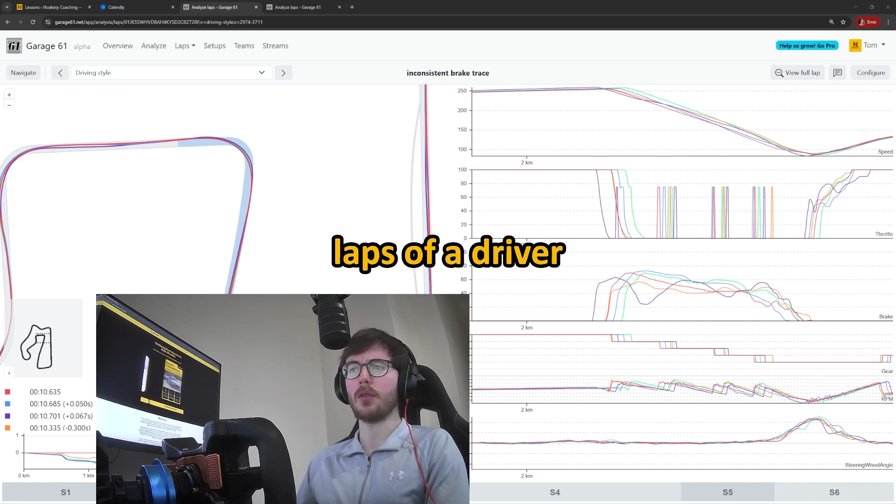So, with that in mind, I want to show you how to use telemetry to identify whether braking is a source of inconsistency for you. So what I've done, I've loaded up Garage 61 and I've pulled 5 back-to-back laps of a driver that I coached recently before we started talking about braking consistency.

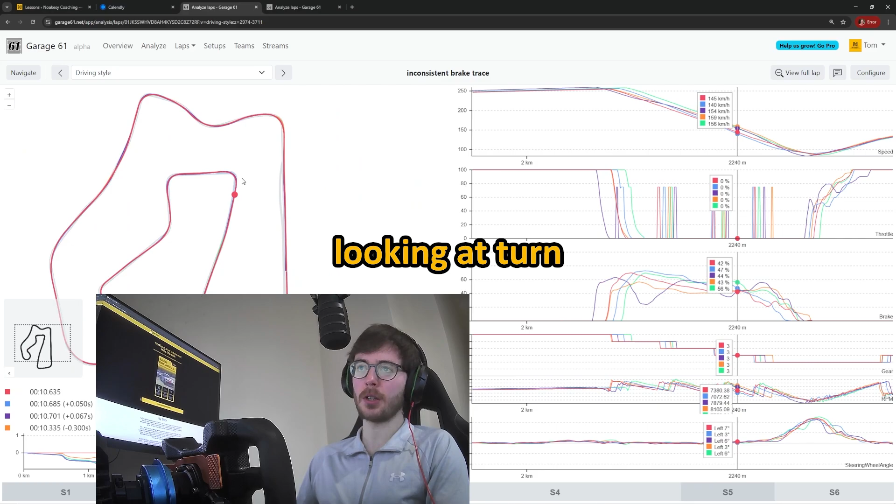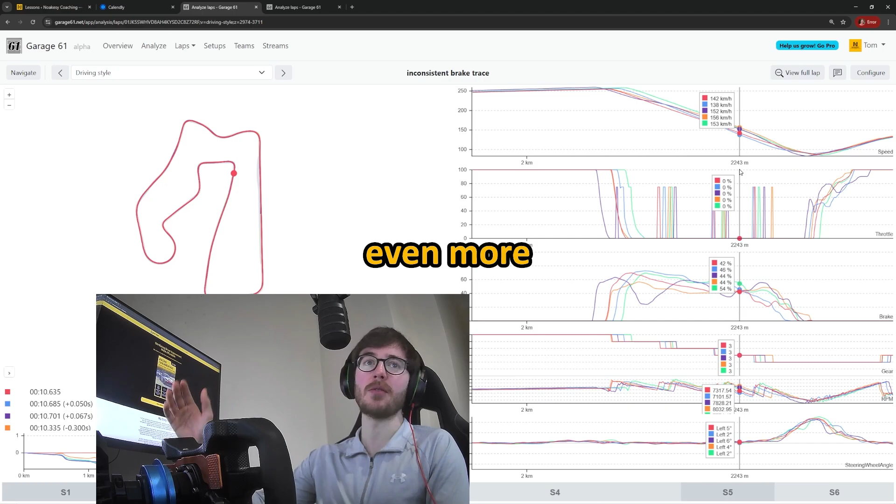And there's two things that lead into braking inconsistently. And the first one is braking at a different point, lap after lap, for the same corner. So we're looking at turn 3 of Road America. This is going to be most evident into heavy braking zones where there's a lot of braking to do, and if you're inconsistent in the braking, it's going to be exaggerated even more than into the shorter braking zones. And the first mistake is having a braking point that's not consistent lap after lap.

And there's a bunch of reasons why this could happen, and it isn't really the aim of the video to explain why it's happening. But the first step to improving is knowing what you're doing wrong. Once you know what you're doing wrong, you can seek out videos or resources to work out how to fix that. All we want to do now is identify what's going wrong.

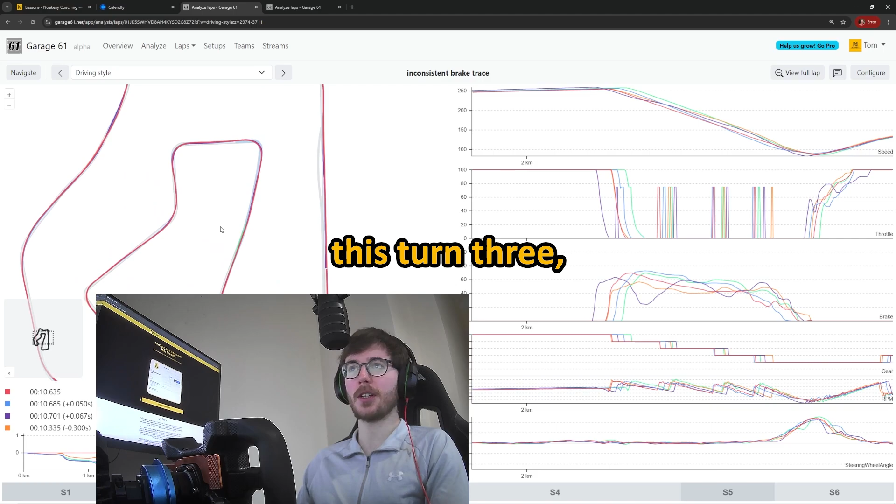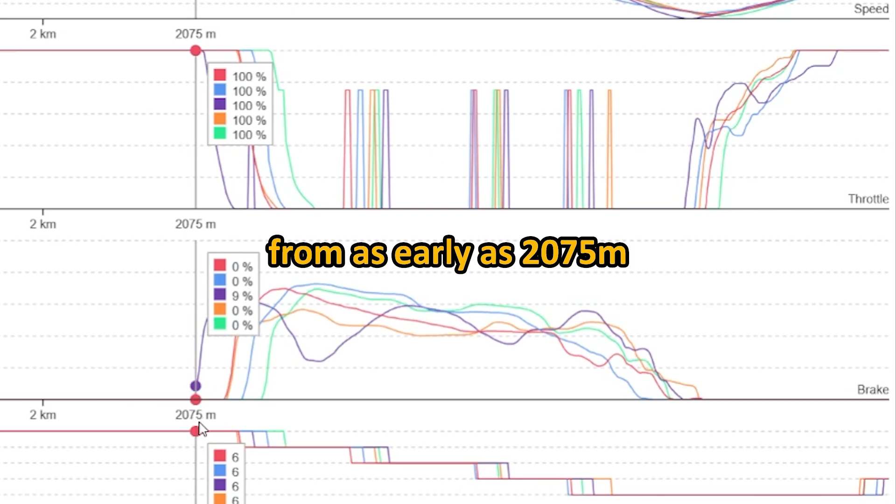So if we look at this turn 3, you can see that over these 5 laps, and these are all consecutive laps, the difference in when this driver starts braking is from as early as 2,075 meters up to as late as 2,110 meters. So a 30-meter difference in braking for the same corner always means you're going to arrive into the corner with a different amount of entry speed.

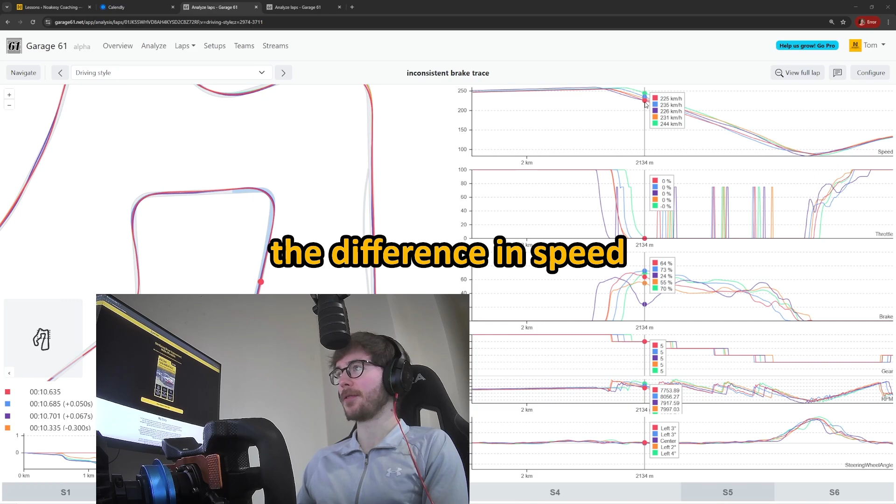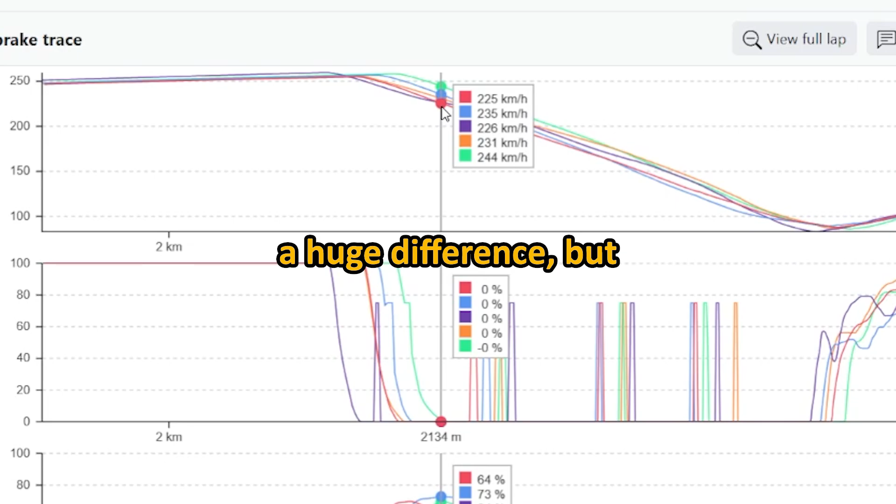30 meters is a lot when it comes to braking points, and you can see here, after we've started braking in all of the laps, the difference in speed we're carrying at this point is huge. So we're going from as low as 225 kilometers up to as high as 244 kilometers. That doesn't sound like a huge difference, but 19 kilometers an hour of speed difference at the start of the braking is going to carry all the way through the braking zone.

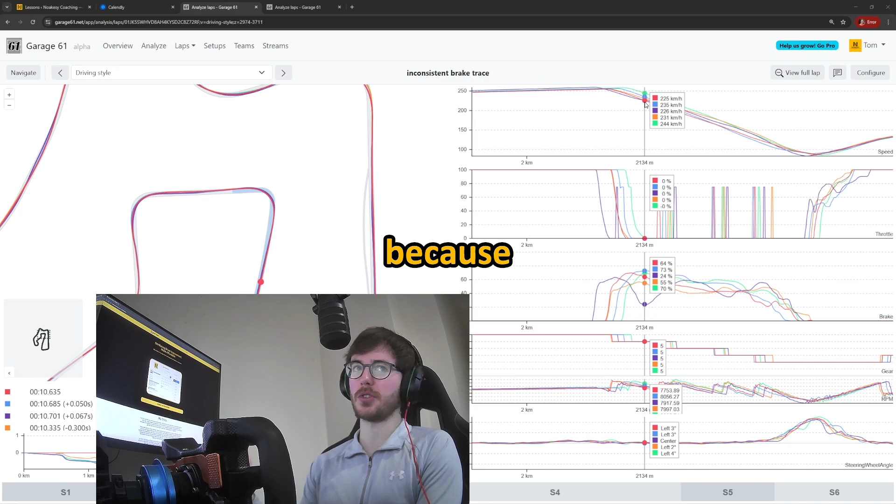It's going to mean that there's going to be some laps where you overslow for the corner, some laps where you're carrying too much speed. It's going to make it so much harder to navigate that corner in the same way lap after lap, because you're not going to be carrying consistent entry speed.

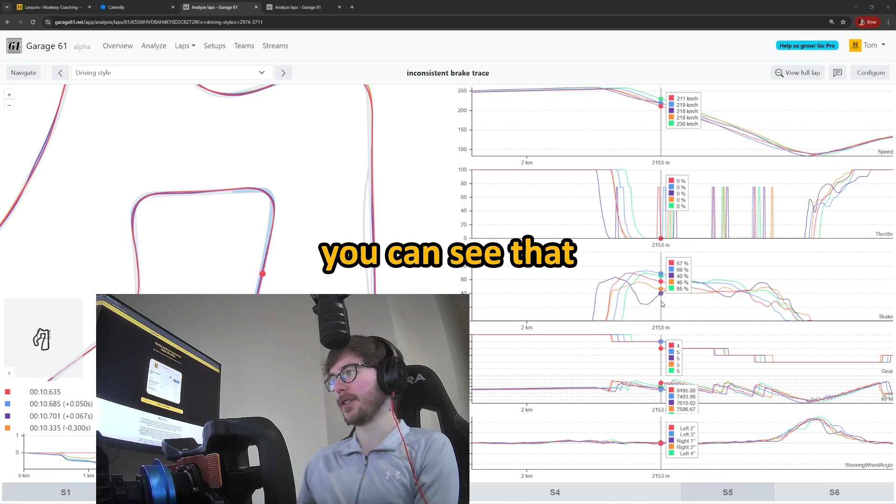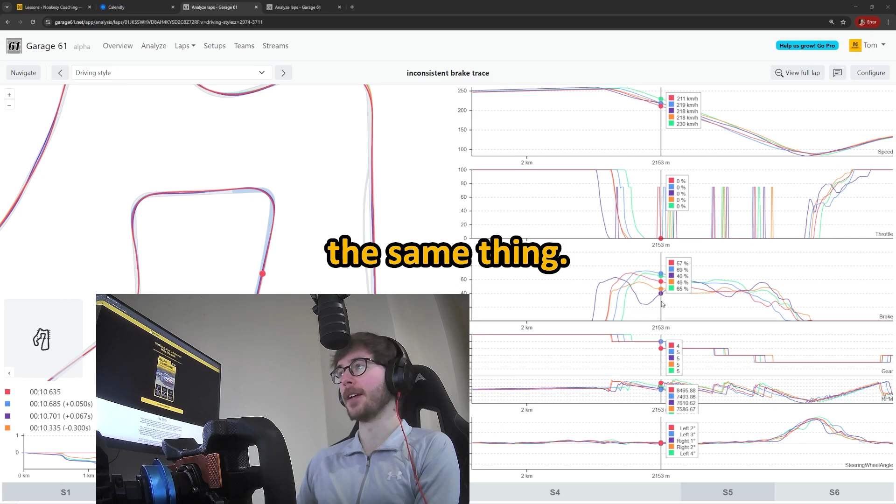The second thing that can be contributing to braking inconsistency is how much pressure you're applying when you're actually braking. And again, this student here, if we pick a random point in the straight line braking, you can see that their brake pressure varies all the way from 40% right up to 69%. So a 29% difference in how hard they're hitting the brakes. Again, this is going to cause the same thing: massive inconsistency on entry speed, which is going to make it so much harder to navigate the corner in the same way.

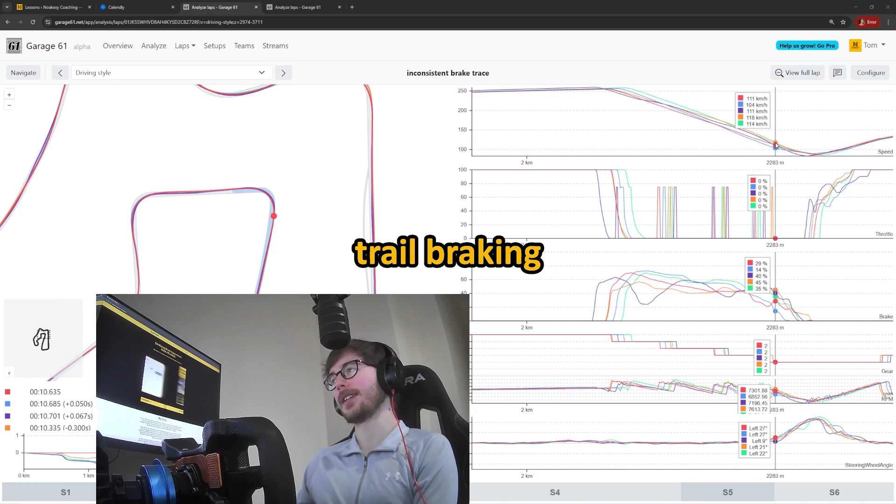This also speaks to why students struggle so much with trail braking. They first try to learn trail braking, as everyone does. They hear trail braking, they think it's the answer to everything. And it does give you a lot more speed, but if you don't get the fundamentals right first, it's going to be extremely difficult. So if your straight line braking looks like this, and you incorrectly think that the thing to work on is trail braking, then what's going to happen? You're going to get into the corner here, where you're about to start turning in, about to start trail braking, and trail braking needs to be precise anyway.

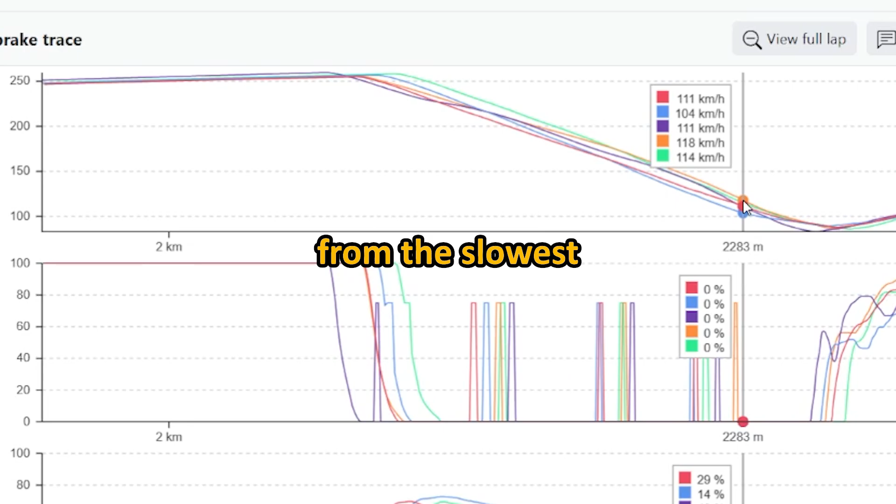And so if you're coming into the corner with 14 kilometers an hour different speed from the slowest to the fastest, there's already too much imprecision in how fast you're coming into the corner. You're never going to be able to be consistently precise with the trail braking, because you're already not consistently precise with the straight line braking.

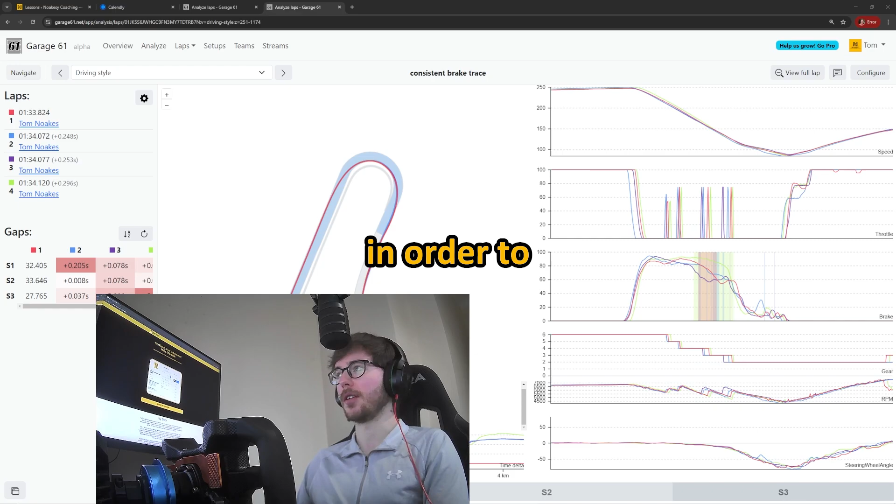So the question is, how precise do we need to be with our braking points and with our straight line braking in order to have consistent entry speed? And there's two rules that we can give here that's going to make it much easier for you to work out whether your braking is a source of inconsistency, or whether there's some other reason why you're being inconsistent.

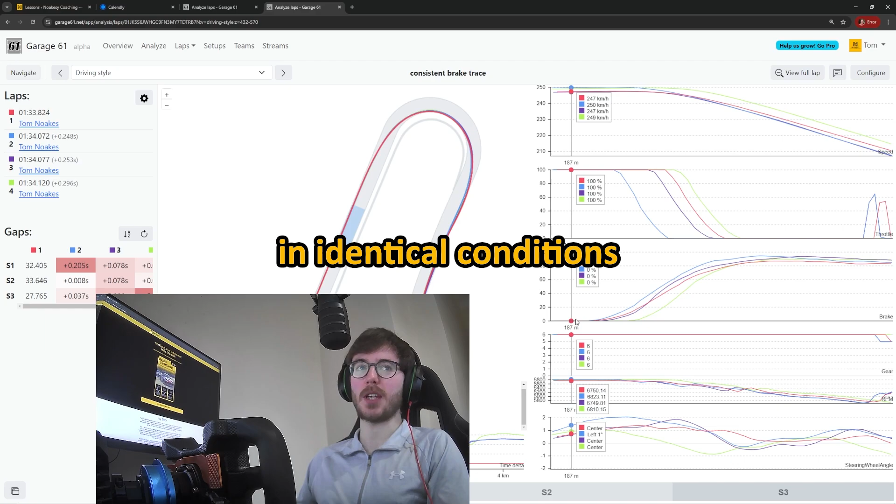And when it comes to braking references or braking points, when we start the braking, the rule I like to use is that, assuming the laps are set in identical conditions and consecutive laps, we don't want more than about a 10-meter variance in where we start our braking.

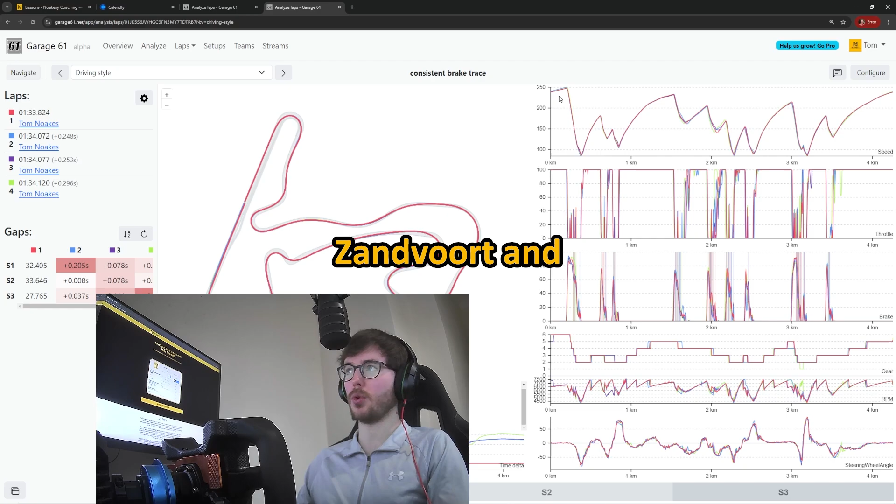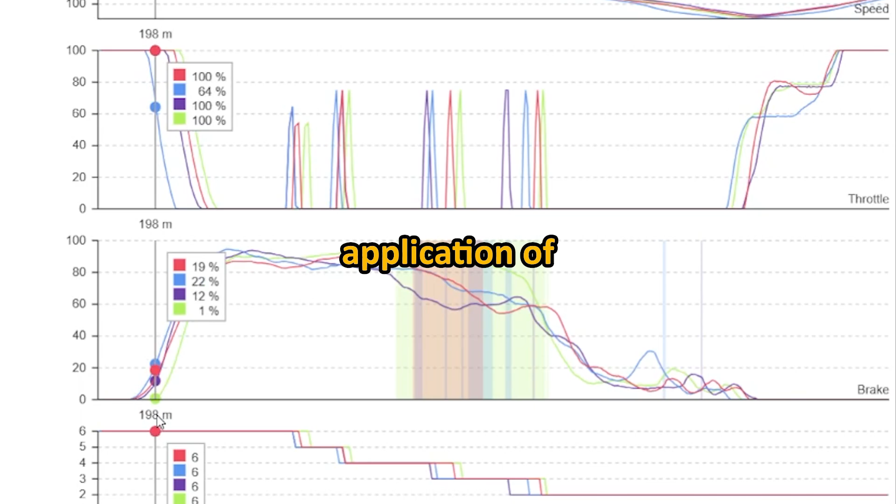And so this is a lap of mine. We're looking at turn 1 of Zandvoort, and this is 4 laps of mine, and the difference in where I start braking, if we look at turn 1 here, the first application of the brakes in the earliest laps is 191 meters, and then the latest application of the brakes is at 198 meters. So well within that 10-meter variance window. That means that the braking point is not going to be really a source of inconsistency for me.

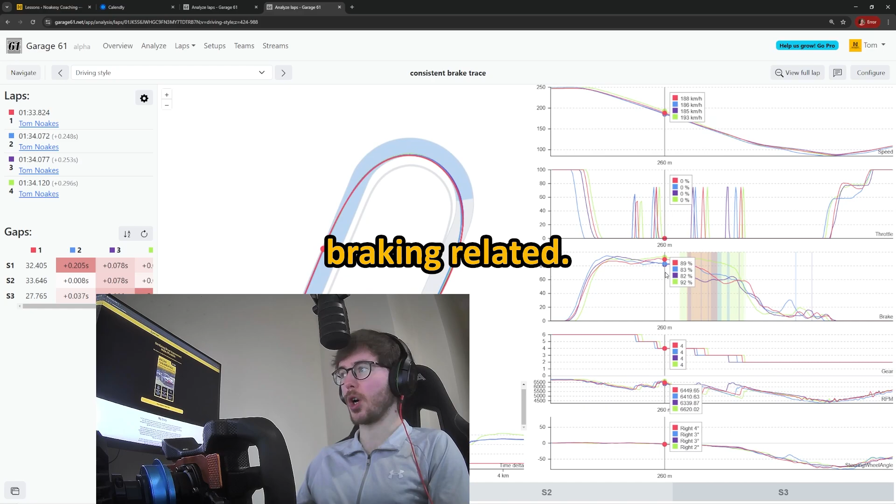And then when it comes to brake pressure, you see my brake pressure varies a lot once I start turning into the corner. So this is all trail braking related, so that's fine. We can have some variance in the trail braking in response to how the car's behaving. You see, round about here, I'm starting to turn into the corner, so there's already variance. But all the time I'm braking in a straight line.

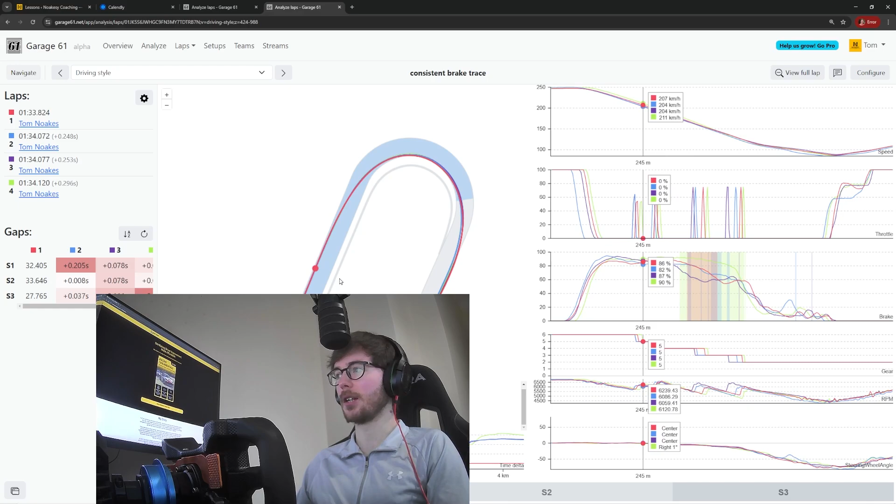The other rule of thumb we want is to have only a 10% variance in your overall brake pressure as well. So if we pick a random point in the straight line braking, say here, my lowest brake pressure is 82%, highest is 90%, so an 8% difference in brake pressure, and that's consistent pretty much throughout the whole straight line braking.

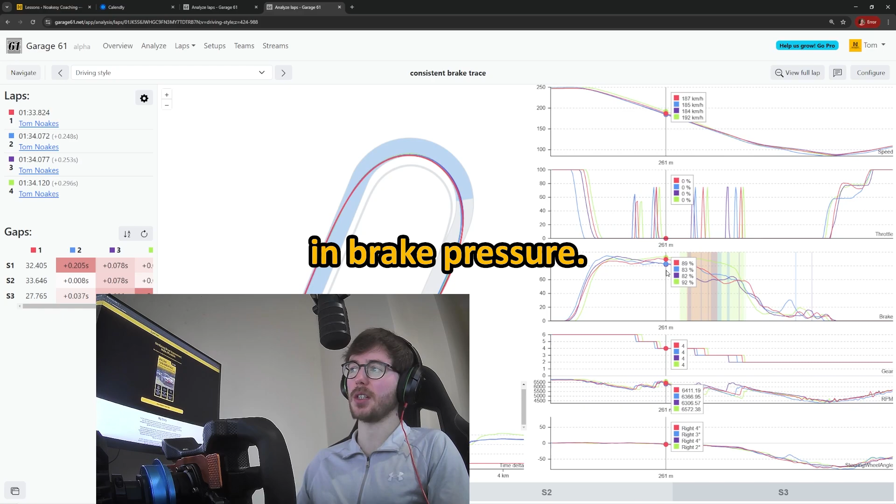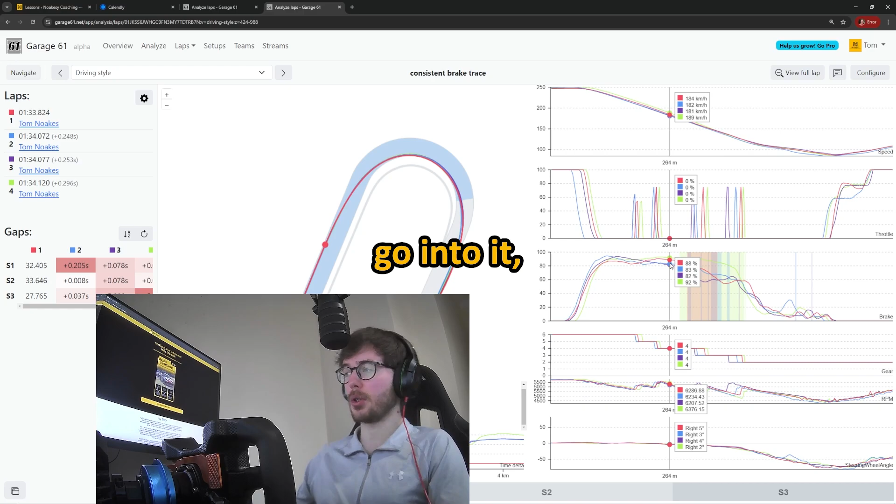There's never more than about 10% difference in brake pressure, and there's a lot that goes into getting this to work, and I could spend an hour talking about that, setting up your pedals correctly, how to keep the braking trace straight in a straight line. A lot of details go into it, but you want to know for yourself whether this is a source of inconsistency for you, and these are the two ways to work it out.

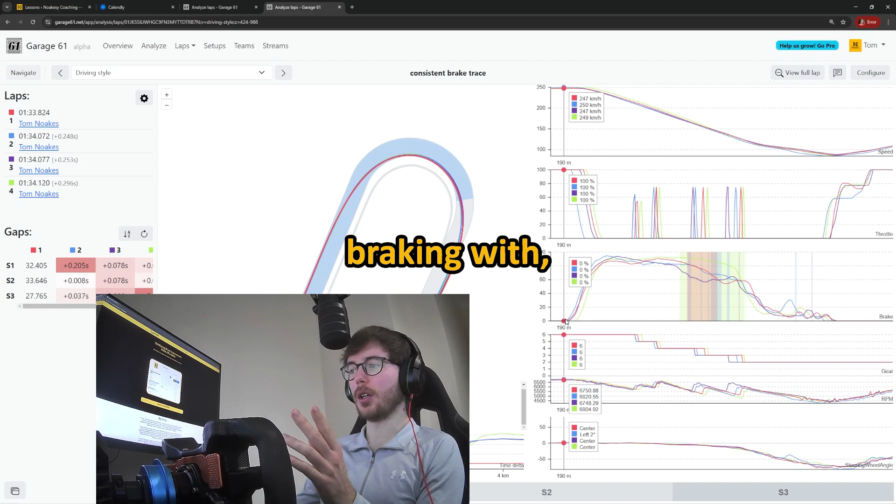Over 4 or 5 laps, are you braking with a braking point variance of more than 10 meters, in which case you need to work out how to be more precise with your braking references, and is there more than 10% variance in your straight line braking? If there is, you need to work out how to be more consistent with the braking.